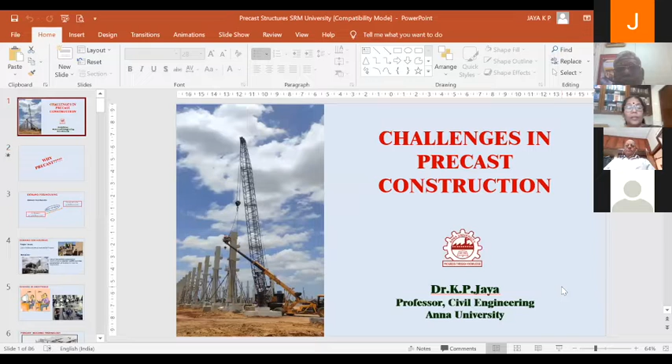So my topic today is challenges in precast construction. Before entering into that particular topic, I just want to say why precast.

We are very familiar with monolithic construction, what is happening in and around us in society. But we need to think about why we are going with precast. Look at this particular slide. Think about the demand for housing. In the Indian scenario, at present, around 26.53 million units is the requirement for accommodating our own sisters and brothers to have their own inhabitance. But after 10 years, we are expecting around 50 million units as the expected requirement. How will we do this with normal monolithic construction?

Now itself, we are facing a major issue: lack of skilled workers to execute the project. This is the normal way of constructing beam column connections, putting partition walls with brick or brick masonry structures. There were skilled laborers available when the demand was less, but now the demand is too high and we don't have availability of skilled workers. So what is the solution? We have to go with some mechanized construction, which nowadays we are calling precast or prefab construction.

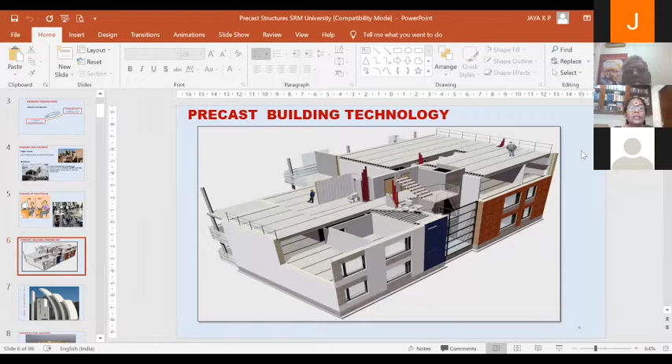And look at this, we are not away from this technology called precast technology in India. This is the historic representation. In India in 1959, we have a building, the IOB building in Chennai, constructed out of precast elements. But unfortunately, later on, we identified that in some portions where water accumulation occurred, water percolation and leakage was observed. That is the major reason behind abandoning this technology from being taken forward in the construction industry.

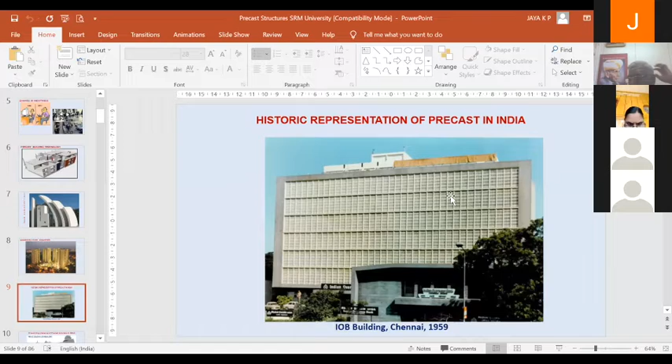There are few strengths like speed, low maintenance, seismic resistance, all those things are there. Along with the strength, there are some weaknesses also, like lack of awareness. Many of our engineers are not aware of this particular technology because we are not teaching them in our PG or UG program. Later, from 2006 onwards, we started teaching precast technology to our PG students in Anna University.

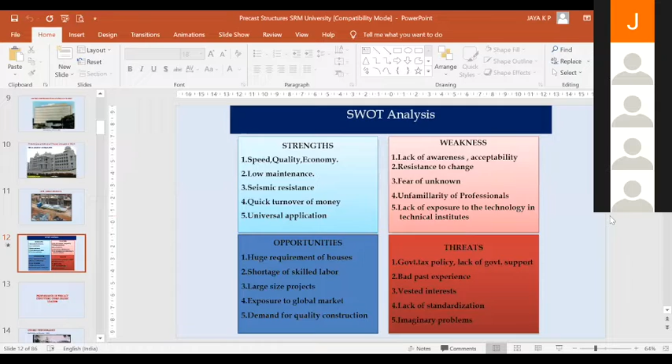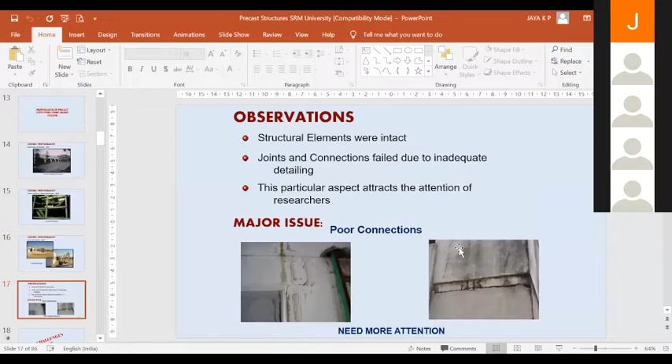This is the Bhuj earthquake, you can see the school building has collapsed. You can see columns are intact, beams are intact, planks are intact, but the structure has failed. That is the major observation — structural elements were intact, but joints and connections failed. So the major issue with precast structures is poor connections. We need to give more attention towards that.

Look at this major challenge here - there cannot be major variation in the positioning of the reinforcements, and all these things have to be perfectly arranged, then only the connections will be proper. This is not only one connection - for a small building itself there will be a number of columns and foundations. All these should be housed properly, then only the execution will happen comfortably.

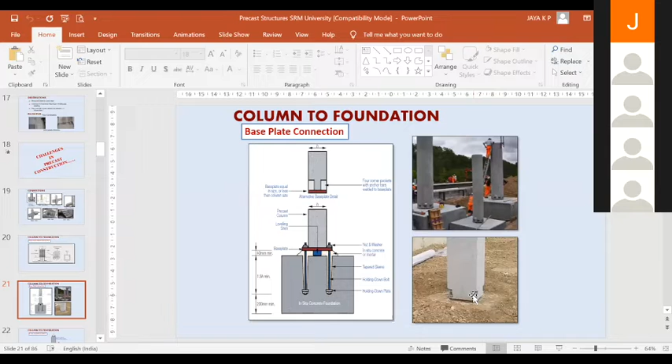You can see here this is a practical view from the site. This is the foundation - from there the bolt will be protruded and the column will be placed with the base plate, and nut and bolt will be connected. This protruded area, this pocket, will be covered with non-shrink grout in a later part, and finally it will look like an in-situ constructed foundation column connection.

This is another way of connecting the column to the foundation. This is a pocket, and this is a column with the shims at the bottom, and this cavity will be filled with non-shrink grout.

Based on this column to foundation connection work, one of my scholars, Ms. Mamadi, has done this research. She submitted her report and she is about to defend it. These are the different types of connections she has adopted.

Precast column connection through the base plate - these are the anchors coming out of the foundation with the base plate connection. And this is the sleeve, grouted sleeve connection.

She has put - you can see here, these are the sleeves. This is the view of the area where the grout will be inserted in a later part. And this is the pocket connection.

There she has used two types of connections. One is the pocket, where she inserts the column - this is the pocket. There she has put reinforcement all throughout, covering the pocket together.

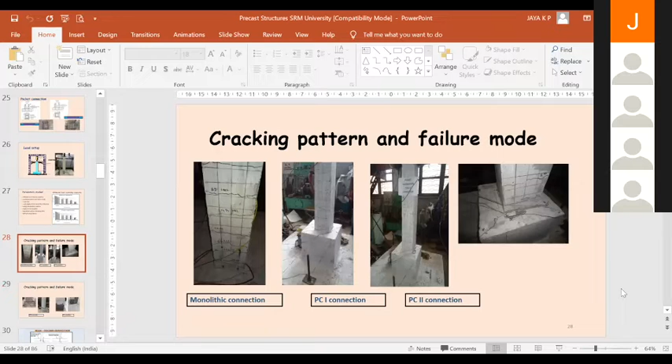This is the view of the load setup in the laboratory, and she has done a lot of investigations. This is the cracking pattern. I'm showing this to give a clue about how we can execute research and come out with a solution. Finally, we identified that the pocketed connection with the totally wound reinforcement all around performed better for a low-rise building.

Now come to the next type of connection: beam column connection. This picture has been taken from Elliott's book - a very good statement that has been made by Elliott also. You can see here, the column is continuous and beams are discontinuous. And here the column is discontinuous and the beam is continuous.

If we think about a better option out of all these, connection A or B may be better, but what is lacking there? We cannot cast multi-story height columns in the factory and bring them to the site - erection is a difficult task. So finally people will go with this type of connection.

Which one? Type C, where all elements are meeting at a particular junction. So junctions are always dangerous - here also it is dangerous. So we have to provide proper connection detailing.

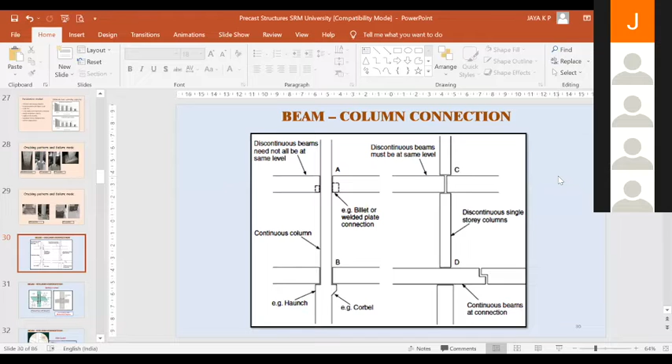These are the various types of connection detailing without corbel. We can go through this - this is the beam passing through the column.

The column is discontinuous, and this is the dowel protruded outward. These are the major challenges in precast construction - this protruded bar should be properly inserted within these column sleeves. That is the major challenge. That is why I am telling you this is a threat, and we need to go with standardization.

So this is the beam column connection with the corbels. You can see here, these are the corbels and these are the beams getting connected. This is a very simple, very safe connection, because the dowels will be protruded outward from this corbel region, and this reinforcement which is protruded outward can come to the columns also to get a proper view. This is the beam column connection.

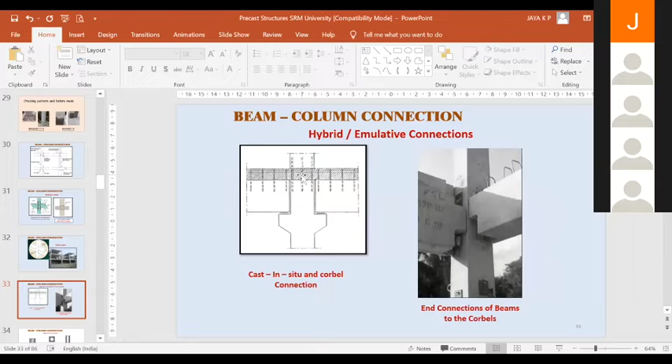Again, this is going with the hybrid or emulative connection. In this case, the beam has been cast - this portion is precast and the stirrups are protruded outward. Later, when it is connected to the column, this particular portion where the stirrups are protruded outward will be filled in with cast in situ concrete. So this is what is called the hybrid or emulative connection. We assume that we can achieve strength similar to that of a monolithic connection.

So this is another type of hybrid connection. This has been generally followed by Shirke, BG Shirke. There they are using a cavity sort of thing. This is a double column connection. This is a shell, and after erection, this interior portion where the dotted shade is shown will be filled in with the in situ concrete. This is the way they are constructing the beam column connection.

Here, beam reinforcement which is protruded outward will be bent into the interior of the column, and they will be connected together like this. This is the longitudinal reinforcement continued through the column region, and this entire portion with the dotted hatch will be filled with in situ concrete. This is the longitudinal view of hybrid connections.

And this is the actual practical view. This is the column - you can see here the protrusion projecting outward. On top of this column, the beam edge will go and sit. You can visualize that in the next picture.

So what has happened here? This is the cavity - there you can see the protruded reinforcement also. The main reinforcement, longitudinal bar, will be connected, passed through this top region, and it will be cast as a single unit in a later part. This is a picture taken from the Metro Rail Station, Kalamassery.

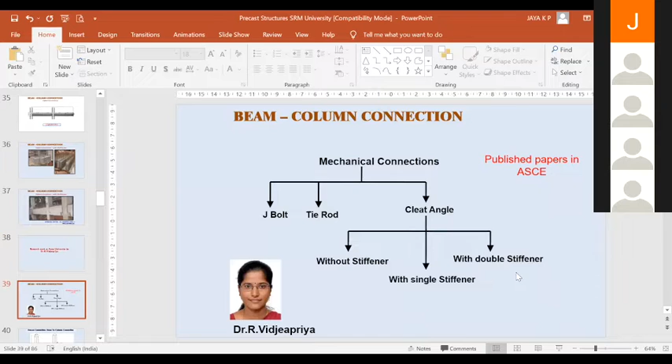This has been done by Teemage Coimbatore. One of my research scholars has done work on beam column connections. She has done a lot of connections, and we have published papers in ASCE journals. These are the various types of connections she has considered.

Tie rod connections, and this is the cleat angle connection - you can see here this is a cleat angle which is connected here. We have connected with one rod here, another rod here, and this is another option with a single stiffener. We have put in this one stiffener also. We have tried one by one.

Whenever we couldn't reach the strength up to the monolithic joint, we did a lot of improvisation. That's what is shown here - we have used a double stiffener also here, and this is the double bar which is coming out. That's what I told - this is a better solution.

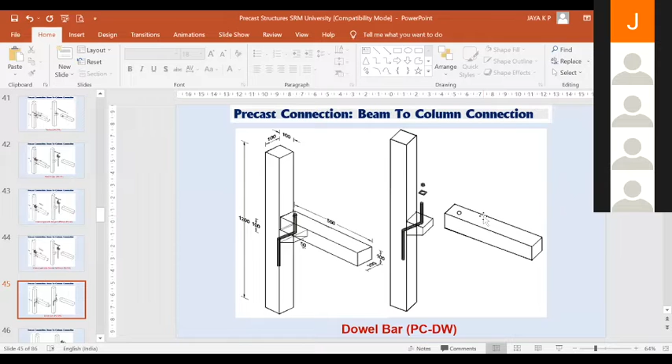This is a corbel. This is a double bar coming from the column region, protruded through what I can call the corbel, and the hole within this beam can be housed through this bar and rest on the corbel. Later it can be mounted with a nut and bolt. This is one another method.

This is the method we have tested in the laboratory, and these are the specimens - she did what I can say is numerical analysis also, and we identified that this type of connection has given more performance during lateral loading.

Now we come to the column to column connections. This is a very, very important connection in any precast structure. This is, you can see here - one minute.

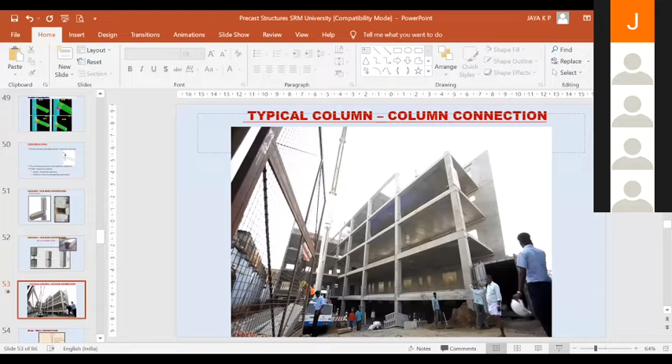Video is viewable. Yes, ma'am. Yes, ma'am.

This is a video I have taken from Chennai Silks Velachery site.

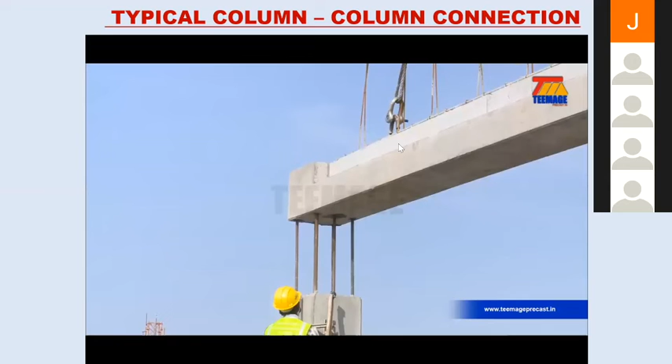I think whatever I told, in one scene it is clear. Am I correct? Yes, madam. Yeah, this is nothing but connection.

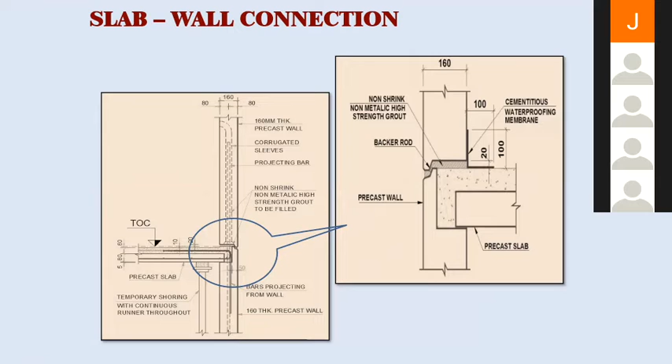Due to the demand or requirement of architects, they have improvised that and changed it into this particular shape and size. You can see here the projection has come down, reduced to this shape, and this is protecting against the percolation of water to the interior part of the building.

One of my research scholars, Ms. Dr. Aradi, she has defended and she got her degree also. She has done work on wall to slab connections.

She has used many types of connections like dowel bar connection, provision of crossbars, and additional shear reinforcement.

She published 4 papers in International Journals, and she received a Best Paper Presentation Award at NIT Calicut also. She is a very good scholar, and she has done very good work. This is the monolithic specimen what we have kept as a benchmark element.

Gunasharan sir. Yes, yes, madam. How much more time? Will I get 5 minutes? No issue, madam, please take it. I think I have crossed my time. No issue, madam, we can manage. 5 minutes, I'll finish it off.

Okay, yeah, this is what I can say. This is a wall to slab connection. You can see here, this is the upper panel and this is the lower panel, and we are getting them connected.

This is the cross section of the precast element. You can see here, it is 2 layers. Because if I take long time, you can see here, this is the proposed type of precast connection. This is the precast element. This particular area we have provided the screed concrete.

There we used, you can see here, this is a wall to slab connection element. And here wall to wall dowel bars, we have provided one dowel bar like this. And this is the bar which is getting connected with the reinforcement.

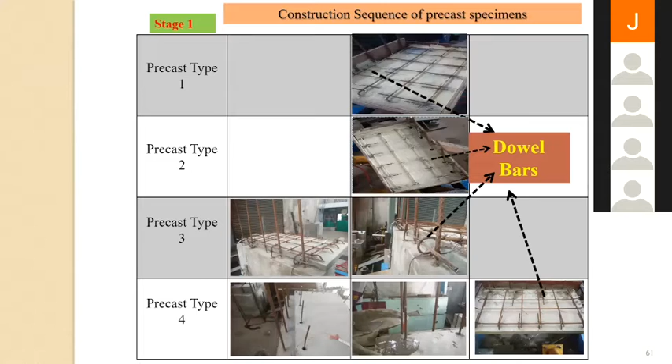And this is the methodology followed at the site. You can see here, these are the dowel bars we used. And one observation we made, I'll tell you in the long run.

This is the casting of the concrete, and later it was placed in position, and screed concrete was poured. This is the final view: this is the bottom panel, and this is the top panel of the wall, and this is the slab where we are getting connected.

This wall, this slab has two parts: bottom precast and top cast in situ. And this is the arrangement in the laboratory. This is the specimen, double acting jack and all these things. And this is the loading protocol.

And these are the hysteretic loops we got, and these are the failure patterns of all these things. The major observation initially we got is there is a splitting up at the interface between cast in situ bars, slab, and precast slab. Our major suggestion based on this particular study is that we should provide shear reinforcement in between the cast in situ and precast slabs.

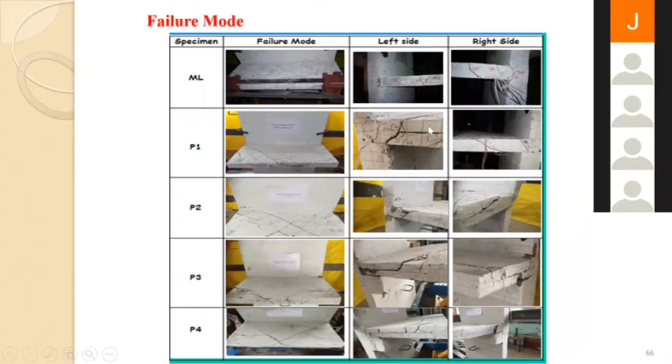And these are the studies she has done on precast. You can see here this delamination of two types of slabs has been very well picturized in the numerical analysis, and exactly the same way we could picturize it in Abaqus software. You can see the lifting up of the slab, exactly as we could picturize in Abaqus. So these are the work outputs of all those things.

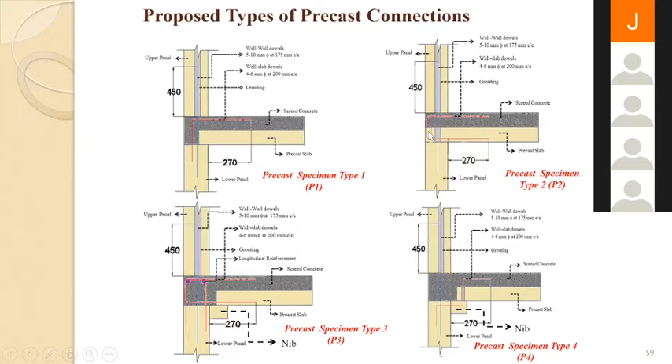What we observed is that the shear connector, the last one, which is protruding through these slabs, has performed very well. See this one with the U-hook connecting through the slabs has performed very well, and the edge also we have stiffened accordingly. This is a slab to beam connection.

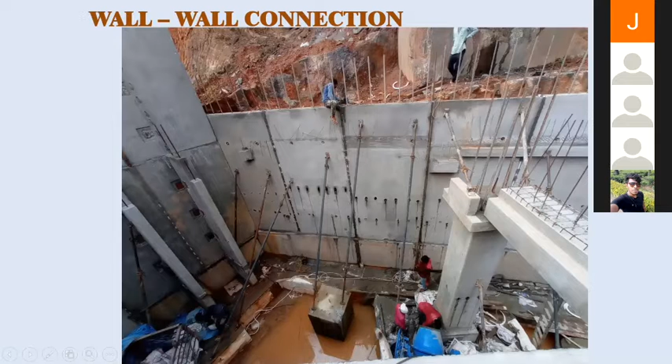Now you can see here, I am projecting the wall-to-wall connection from the picture from the side. This is one wall to another wall connection, and we have to provide intermediate loops between these walls before pouring the concrete. This indeed is the joint region. We are pouring the concrete at a later part after connecting the walls together.

You can see the view of it. So this is the connection region. Later, we provide formwork on the outer side of this connected detailing of the reinforcement, and the concreting will be poured after placing the walls.

And we are using, most of the time, these type of loops or bent reinforcement. There is a lot of work happening at IIT Madras with Dr. Amlan Sengupta and Dr. Meher Prasad. There is much work happening with respect to these wall-to-wall connections.

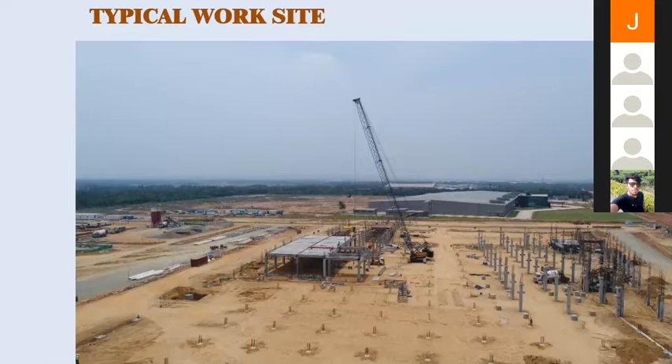But if we get a site like this, yes, we can enjoy like anything. But it's very, very difficult to get a site like this with an open space. So with this typical site we can be happy. And look at this, there are a lot of complicated plans.

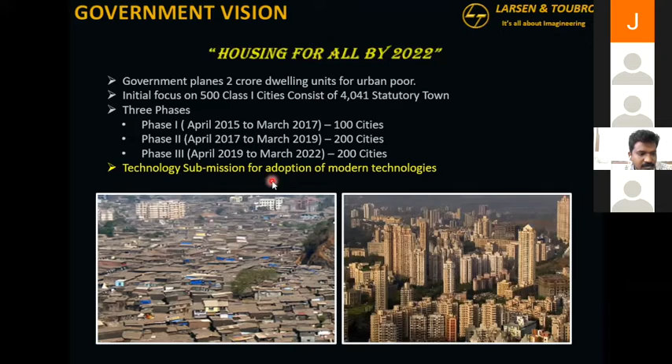We are not doing anything new. Most of our neighbors have done this already. If you see Singapore, Shanghai, Tokyo, Hong Kong, they've all gone through the same challenges and housing situations. What is unique to us is, they've all done this in a 20-25 year timeframe, but we are looking to do the same thing, or actually at a larger scale, in about 7 to 10 years. So that's the challenge that we have.

Again, in terms of infrastructure, have we not done this already? If you see our metros, airports, and the high-speed railway now being built, the latest technology is already there. If you look around Mumbai right now, there's a high-speed rail project, an entire metro development, and coastal road development going on. In one city, there are 3 landmark projects going at the same time with the latest technology. Most of the situations that probably not even the European or Western world have experienced, we are using those.

But if you look at housing, somehow that has not translated. We are still mostly using conventional means. 95% of our construction is still built using conventional methods. The only way, or one of the key things, how outside countries have solved this problem is mechanization. So when I say precast building, that's not the only solution. Any mechanized building, anything that works on a mass scale, maybe PEB or precast. Precast works well because our population is used to concrete and there's huge comfort in seeing that brick and mortar building. So that's how precast is becoming popular here.

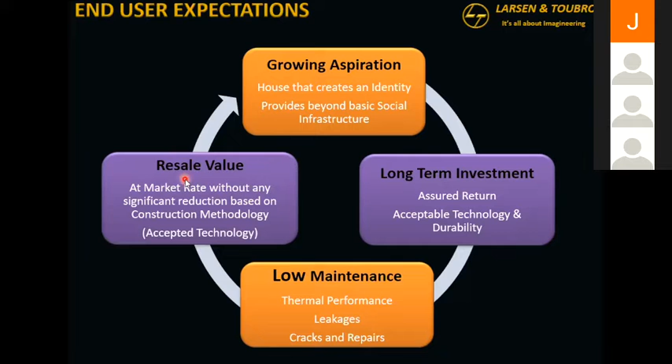So they want a house that's a status symbol. They want something long term, not something that will stay for 5-10 years. They want that house to be given to their families. They want low maintenance - that is one of the key agendas, because whatever the housing prices and all, their main worry is will I be able to maintain that house. I don't want this additional burden, because I get the house at a very encouraging price. And of course the resale value should be acceptable - tomorrow if I need to sell it, somebody should willingly come and take it off.

So that's the basis behind what we look at when we evaluate different technologies. I think, college students, over the next 10 years we are going to evaluate various technologies to get rapid construction in place. These are the key things when it comes to housing you should be aware of - this is what your end customer wants.

Now what we have done - if you see, this is pretty much the history of L&T. We have been doing conventional construction since the last 50 years. In the 90s, we experimented with tunnel formwork. This rapid construction demand is not new - we have been doing this day in, day out for several years. If you explore the way the technology works, even today this is by far one of the fastest construction methods you are going to see.

It works even faster than precast, but it works for very boxy buildings. There are very stringent layout requirements that usually are not accepted by the end customers - rectangular buildings, or very rectangularish layouts, which usually does not work in Indian construction.

Then around 2000, we started doing aluminum formwork. This quickly became one of the most popular construction methods now when it comes to rapid construction. In residential construction at L&T, 95% of the projects to date have been constructed using the aluminum formwork system, to an extent where within L&T we own probably about 6 lakh square meters of shuttering - usually that's a huge number.

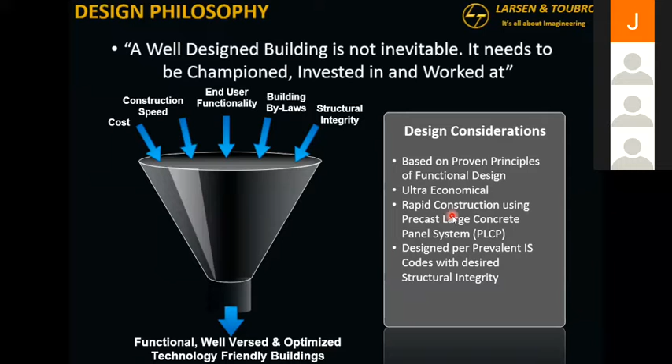With all those parameters working together, L&T is one of the very few contractors who has its own in-house design firm. I used to be in the design field, now I've moved to the BU side. But we are one of the few contractors who have all design engineering teams, including structural design, architectural, MEP, and construction methods. So we get that one unique solution, and that's how the precast technology at L&T has evolved over the years.

So the client gets one answer. He's not going elsewhere just because you are doing precast, asking what do I do at the MEP. We don't say you go to a different consultant. The solutions we are looking at, which will probably over the years set the industry standard, look at all engineering aspects.

Now, before we go further, one key point to note is we usually have two different systems. One is the beam column system in residential construction, which is what we have been doing for several years. And then the new rapid construction - usually the aluminum formwork system, the tunnel formwork system, or precast - they come under this load-bearing shear wall concept.

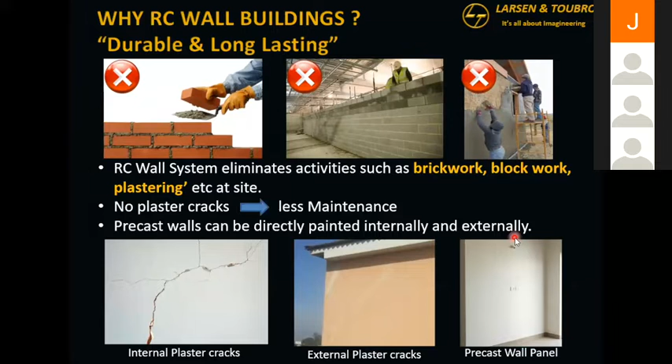It's going to last there without these maintenance issues from both internal and external factors. So this is one example. This is our own project.

Especially for mass housing or government housing, where maintenance budgets are not sufficient - if you see this building, the first story was done in cast-in-place, and above is precast. This is a 9-year-old building which has been handed over. If you see the plaster, this was actually year 2 and year 3 where it starts fading, spalling. The paint is going because the plaster was never meant to be a long-lasting element - it's a finishing element, but it absorbs water, absorbs moisture. The moment water gets into that, you're going to see the paint fading.

Here, it's an RC grade concrete. The paint has not been retouched for 8 years, and this picture was taken about 6 months ago. So in 8 years, that building has stayed the way it is. I'm not going to go into key details or advantages, but in general, whatever benefits you get in RC aluminum formwork type buildings, you are going to get the same benefits in precast, plus the advantage of speed and quality, which comes from factory quality control. How about the design now?

What do we do when the precast design comes into picture? Even in the structural philosophy, there are two main things. We are probably going to focus on the large panel system that we proposed for housing. Then, of course, there is the beam column system and separate research. Professor Jaya has already covered a lot on those connections.

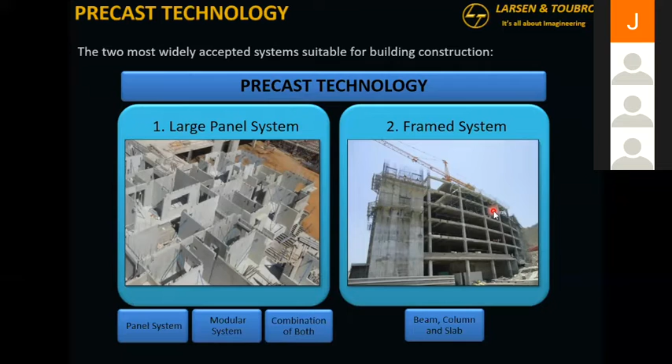When it comes to load-bearing wall systems, all you are looking at is dismantling your building into as many 2D elements as possible. Those are easy to manufacture, easy to transport, and then pretty much just take them to the site, assemble and stitch it. What we call stitching is the wet concreting to connect these two members together.

There is no rocket science, but from a contractor or rapid construction perspective, the conventional construction system has formwork, reinforcement, concreting, then you come back and do block work, plastering, POP work. What we are doing in precast is mainly eliminating this block work, plastering, POP work, which usually takes a lot of workforce and a huge amount of workman activity. Whatever key or cumbersome activities are left over are done at a factory. Then you transport the element and finish at site - that's where your advantage of time is coming.

Structural design philosophy wise, if you look at the conventional beam column system, we'll have beam columns as gravity elements, with some lateral shear wall elements taking your wind and seismic lateral load. What we are proposing here is that by default most of the walls are going to be your load bearing members. Some of those walls will be shear wall elements, and that's how you design the building.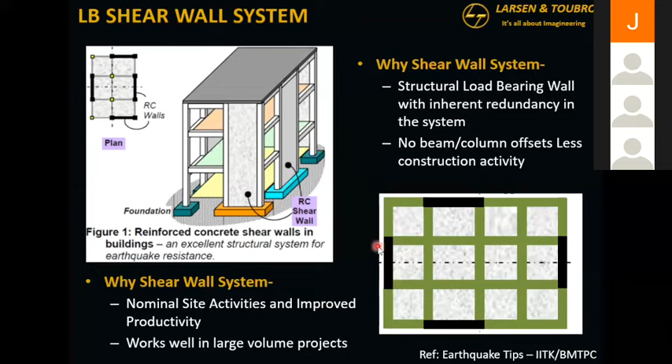It has its own redundancy. In the earlier system, with the progressive collapse requirement, if one column is damaged, your entire large area is in question. In this system, if one small portion is damaged, there are still several walls there to take care of that element, so that redundancy is better.

Now with that system, how do we analyze the precast system? What do codes say? This is one thing I want to stress with everyone. In precast connections, there are two different schools of thought. One is the emulative approach, which says you detail your system such that it will behave equivalent to your monolithic RC construction. And then there is the jointed approach - welded and bolted connections.

Before I came to India, all 10 years I was doing only welded and bolted connections. Nobody is doing the emulative approach there. Why? Because it takes time, there is wet concreting involved, and it's more expensive to do it that way. Welding and bolting are easier. Second, usually they don't build tall - usually buildings you will see are 12 to 15 stories, not more than that. More than that, usually steel is cheaper there, so that works well.

Here we are building a 23 story building, and we even have designs for 30 stories, where the emulative approach works well, even if it comes at a slight cost of time on site activities, but performance and design is similar to conventional. So that's how we have taken all our residential projects that you see.

They're based on this emulative approach. If anyone is interested, there is actually this ACI document 550.1. There are various revisions also, but this is one of the best guides from the American Concrete Institute. What that says is basically emulative detailing provides structural performance that is equivalent to the structural performance of a monolithic concrete structure. Equivalent, that word is important.

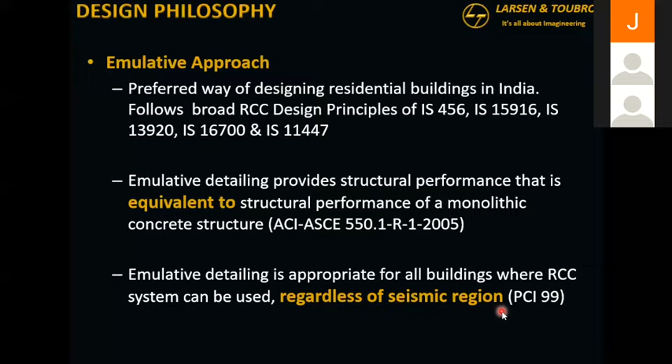Apart from your lateral design and all, what you will usually do is establish structural integrity connections. The rule of thumb has been that each element has to be connected to at least 3 adjacent elements. So if you see your slab, it's connected to 2 additional slabs and the beam or the column. If you see this column, it is connected to 2 beams and the slab. So that has been the industry rule.

There are requirements for this. Even IS 15916 specifies now all these minimum rules of thumb. It is a prescriptive design, what all ties you have to do, and the forces, or what steel is to be provided. Those details are available in Indian codes now.

Now, quickly looking at that structural integrity, or emulative, or the equivalent performance I mentioned - that was there, but when we started, we wanted to validate that at our end. So what we did is, this was a program done in 2015 in conjunction with IIT Madras and SERC Chennai.

This wall is different. We used grouted couplers to make these connections that you see here. This is one of the very popular systems used in Europe and the Western world to make connections, the grouted coupler system. And why it gives better performance than even the conventional system is, this conventional system still has detailing based on lap, so your lap connections are governed by your concrete around it.

The principle is, if that concrete around is confined, that's exactly why we do the horizontal shear loops and all, to confine the lap bars. If it's confined well, it will give you better performance. And if you see in this grouted system, this metal sleeve is confining that grout.

And it will do that for 20 cycles, then pull that bar to twice the yield, do 4 cycles, it will pull that bar further to 5 times the yield, and then it will make it go to failure. So that's where that ductility is getting looked at, right?

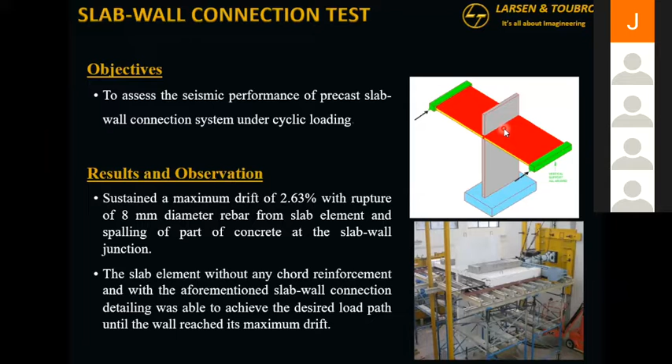So we did another test program where we looked at even the diaphragm action, how the slabs are collecting the loads and transferring to the shear wall. Again, full scale specimens, and everywhere we are getting more than satisfactory performance, and the validation that the detailing we are using is actually working.

If you see, this is also the same discussion we had with CIP concrete precast slab, that delamination issue. With the kind of detailing we used, we did not see the delamination effect. We followed the forces and all, the detailing was done right.

Same for the vertical shear wall joints between two panels. Again, for that shear we tested, then validated. So the entire system we are proposing for this load bearing shear wall for housing, those key connections have been validated in-house.

All the detailing, emulative detailing has been in place for the last 50 years. People have been using it outside. We have not evolved or done anything drastically different.

We have probably tweaked it to suit our requirements and then adopted it. The next phase was getting approvals from various agencies, and this system we use now has BMTPC approval, which gives fast track adoption in all government projects. Of course, IIT Madras, we work very closely with them.

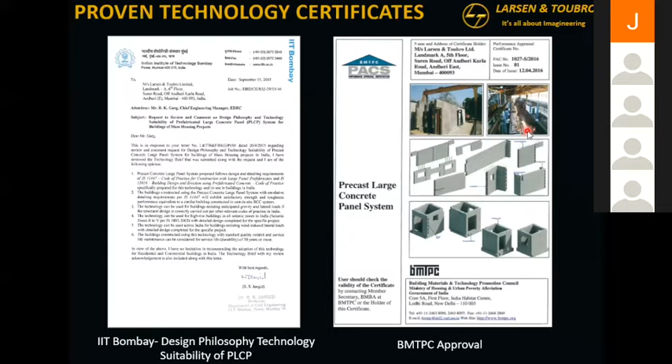All our projects, Dr. Meher Prasad and his team, get peer reviewed by them line by line by default. IIT Bombay has also reviewed it, IIT Delhi has reviewed it. We have College of Engineering Pune, VJTI Mumbai, all leading institutes. They have gone through it in detail, what details we are doing, and we are ready to use it in any large scale projects.

I think time-wise I am already slightly behind, so we will just go through the case studies quickly and then open it for questions. These two projects I wanted to mainly focus on: G plus 23 storey, about 70-meter tall buildings. We built 6 buildings in Mumbai.

This was one of the first projects we did, about 2,000 houses. In the pictures you see 3 towers, we built another 3 towers later. So total 2,000 units there.

This is the Provident Sunworth project. It came in the 2013 timeframe, after we did this. This is 66 buildings, about 6 million square feet built up area. This was about 1.2 million square feet on the earlier scale, and this is a much larger project. We have handed over phase 1 and phase 2 already, about 3 years ago, and then some of the commercial buildings we will go through.

Provident, I'm not going to spend a little more time on since we're running out of time, but various awards are already in place. Even the ICI award for the Mumbai project, we got first - ICI started one new precast award, and we got the first year's award for that Mumbai building.

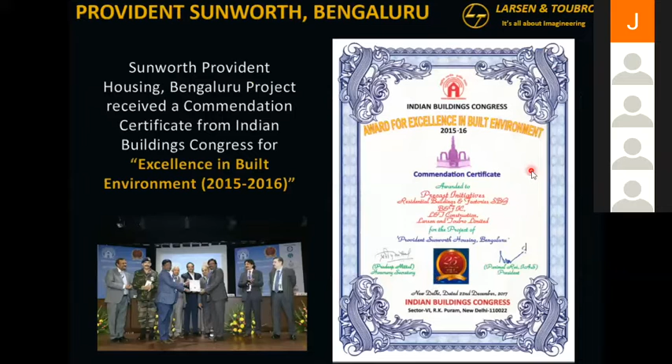But this one certificate, it kind of talks, and we are more proud of it than any other, because it came extemporary from the client for the speed. That G plus 12 building was constructed in 3 months flat. That's the speed advantage you get from this technology, where conventional construction would take at least 5 to 6 months, if not more. We completed that in 3 months at peak.

So this is the project snapshot. These are the 4 phases that you see, each band, and we have completed 2 phases. The balance 2 are under works.

This one thing I wanted to point out: the first building I showed in Mumbai was the PMAY housing or SRA building, all units the same, smaller units and typical. In this Provident project, this was pretty much like a sale building. These sale units, two types, whatever is there in the market or any traditional housing that you would see, the same was taken and adopted without any changes, and we kind of wrapped the technology around it.

In the first year, the developer was saying that whatever precast they adopt, they're not sure how users will accept it, so they were not actively marketing it. Two years down the line, this is from their brochure saying 'advantage of precast' - they're telling people openly, saying I'm building this in precast, I'm proud of it. They even gave another job in Chennai down the line. So that's how adoption has come over the years with this technology.

So these are some of the pictures during construction, and these are some finished pictures. If you see the buildings when they're done, the whole philosophy behind pushing new technologies is the end user should not see anything different. So the whole idea behind detailing and execution is, once the product is finished, even our engineers may not be able to tell exactly where the joints are, how it's finished, or how the building was built. For them, it's just a finished flat.

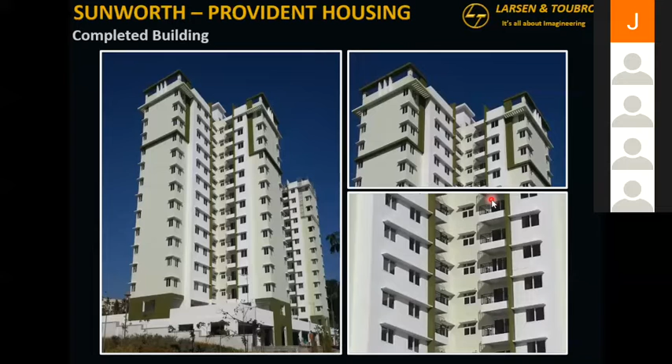If you see, this is one of the finished buildings - it looks exactly the same as they would have expected. Even if you walk inside the building, the sample flat was built using precast too, and once you walk inside you don't see anything different than what you're used to seeing. That is the goal. The factories are set up, and the whole advantage of the technology we have been pushing is very few people.

And they will do the same thing day in, day out. Second thing, the speed depends on how many cranes you put in. If you see aluminum formwork, it depends on how many sets you can put in. That's an expensive affair, that's a capital expense. Here, my factory is already sized. If I want to open up another 2 towers, all I have to do is just rent one crane and put it in, the factory is already sized for that production.

So that's the advantage. As for quality control, if you see Bangalore, this factory did not even put up the shade because it doesn't rain there. But that does not mean the standard quality is not followed. We still have the same quality measures, same quality parameters that you would use on any conventional site.

But you are working on the ground, right? In tall buildings, working on the ground versus working on a 17-story building is an altogether different ball game, both for the workmen and for the monitoring. Somebody has to climb up there and see. Here the person is roaming around at the ground level every day, looking, checking everything in detail, and then only approving it.

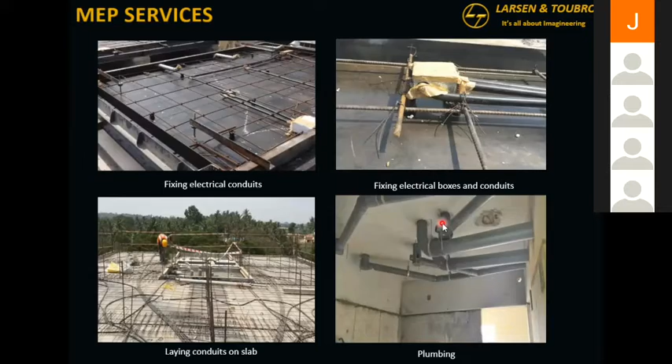So either you do this undersunk approach - this developer agreed to that, and it works well. It's easier to repair also than the sunk areas. But if you want something embedded, we do the chases for plumbing lines.

So this is how the panel will come. Electrical is already embedded, but for plumbing you give the chases so that the piping is laid and then patched. So later, if you want access, all you have to do is just open up the patched area easily, replace your pipe or rework it, and then close it.

On transportation - in 2012 and '13 we used to talk a lot about how to transport heavy elements, but over the years now there are standard trucks available, there is equipment available. It is not a big deal to transport a 10-ton element anymore, except for the road network. We don't have that kind of infrastructure yet.

So what we usually do is set up large-scale factories at the site itself, so I don't have to worry about transporting for longer distances. When the elements go outside, the same quality control applies - like I said, a well-trained gang of 12 to 15 people, they know exactly what to do. They don't have much to do also. Elements come from the factory ready.

You just have to prep the slab, make sure all levels and lines are maintained, the dowels, whatever you want, are there and correct or not. You clean the joint, erect the panels, align them. We have these push-pull props. Make sure that the joints are grouted, put your slabs, and then do the slab concrete pour.

That monolithic pour is what we call it - all these slabs will be erected, and then the entire floor will get a continuous cast-in-place structural topping, 75 millimeters thick, that acts as a diaphragm that gives me the continuity and the stitching we are looking at.

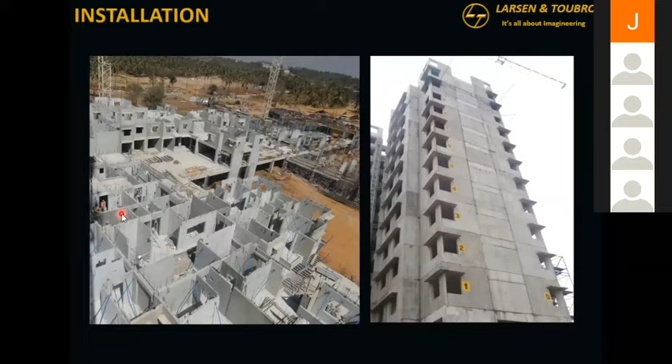This one job quickly, just to give a flavor of how we adopt different approaches. It's a very small job - usually we don't even venture into these jobs, but this came up because they needed it in 8 months. This is a hostel building for Tirupati Devasthanam. So they were originally G+3 systems.

They were designed for 2 extra floors. With the speed we were using, the client said to add the 2 floors immediately because they weren't sure if 3 floors would be completed in time. So the design philosophy was: build 3, start using the hostel, and add 2 floors later. But given our speed and the system we had in place, they said just add the 2 floors and finish the building. So this is how it's done.

It's a small building. We had 4 or 5 buildings. What I wanted to show here is 2 unique things.

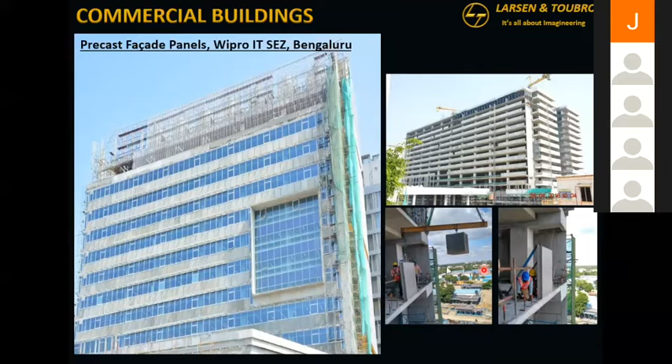This is a building in Bangalore, Wipro, where only this facade was done in precast. Like I said, we are not in the precast manufacturing business, but across all our jobs, the idea is: wherever the system gives us the benefit of speed or fewer activities at site, we adopt it. Even this small portion - doing this band cast in place with shuttering, compared to casting off site and erecting element by element at site. That's the idea, and it has really picked up well in the last 5-6 years.

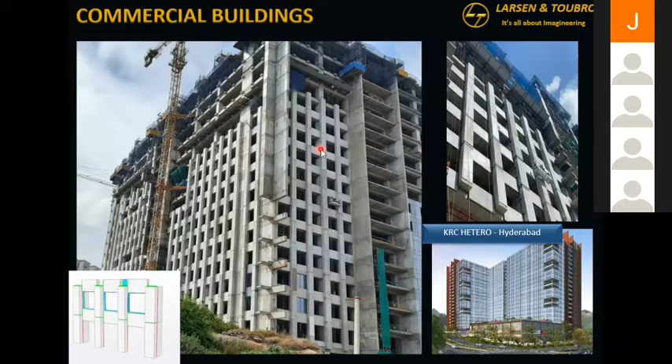We are now exploring the same thing in a job in Mumbai. This is a 27-story tall hotel where the entire facade was planned in block work, which takes a huge amount of time. We converted it to 2 floor-to-floor tall precast panels. Each panel is erected in under 30 minutes. Imagine it's a 4.2 meter tall panel, 2.3 meter wide, erected in 30 minutes - that's the speed we are looking at on site.

Pre-finished has been a big thing for us. In Mumbai, all residential buildings, even one of the topmost elite housing buildings, we are using bathroom pods now. The idea is the pods are cast in the factory, with the entire toilet unit finished at the factory, no activity at site. Lift it, place it, and it just gets opened once the site nears the handover phase. No other work in the toilet is done at site.

I think, Professor, how are we doing on time? About 5-10 minutes more? Yes, sir. We can go ahead, sir.

So now I am just at the end of that presentation. We've talked about the system, the design philosophy, and what we are doing at site and how we are setting up the factories. This now is the handover stage, how I give it to the client. Usually the client's concern is speed - everything is the contractor's issue, he's not worried about it except getting the building faster. But his main long-term worry is how the building is going to perform, whether there will be cracks, whether the building will fall under earthquake, or in day-to-day services whether moisture and water will get inside. We have been working diligently on that detailing to make sure the buildings perform similar to what we are used to.

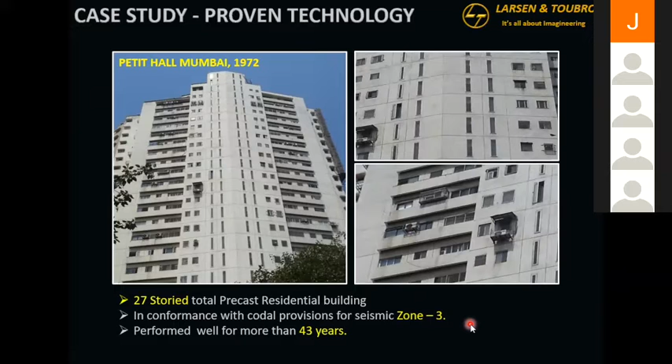Each flat is about 15 crore plus in value now. It's one of the prime real estate areas, and it's an occupied building without issues. There is maintenance - on one of the facades they see moisture seepage and they treat it and work with it. So if you look at the detailing, the durability, whether the joints will sustain - those questions aren't there. The building is in zone 3, has seen a fair amount of shaking even if not an active earthquake on its own, and it's in pristine condition. So if you detail well and maintain well, these buildings will last forever.

This is M30 and above concrete - it's not your usual plaster. The actual concrete grade we use based on our factory requirements is usually M45 to 50, so the concrete stays there. What we have to do is pay attention to detail on the joints, make sure all your QA/QC is focused on the joints - the rest of the QA/QC is taken care of in the factory.

This is the same project, Professor Jaya, where one of the first inclinations to protect against water ingress was to physically add a barrier - just put a band on it. Some architects liked it, some didn't - they didn't want the band. So now we've evolved the detail, doing the same thing but putting the step inside, and working with it to see how that works.

The whole idea is water cannot climb up effectively, so make sure that the path is blocked that way. In addition, we do additional treatments at the joint. Now usually you won't do waterproofing inside.

This is a living room, kitchen room. As a management, what we have taken the call is, even within the flat, if there is a joint, we are treating it. So between living and kitchen also, it's not just between two flats or two living rooms. All entire joints, we are taking that extra precaution and treating those. And then subsequent water ponding, select areas and making sure how it works. So that kind of precautions are taken and evaluated.

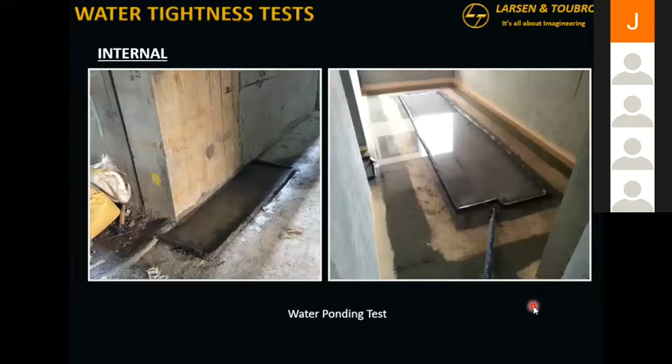So it's as good as we are building water tanks. Even the external joints, we have a rainfall simulation test, to make sure how the joints are performing for moisture entry. Now we have IS 15916, the 2020 version, and these requirements are actually incorporated in the IS code itself. So you have the basis to ask the manufacturer or vendor what kind of or what scale of testing is needed. So those details are available there.

Last part of quality control is we are testing and scoring our own buildings. So we have an in-house system. If you are familiar with the Singapore system, they have CONQUAS, which is for construction quality assessment system. So we have developed something similar to that, calling it the precast building quality assurance system. We are scoring our own buildings for various aspects, structural, architectural. We have our own teams that go and score these points.

Right now, somebody will ask, you are scoring your own buildings, you will give 100 only. So this is not something that the client is asking. This is our own initiative, and the idea is I know what I am doing. So the Mumbai building I have built, the Provident building I have built, and those buildings are scored. Those scores are coming, let's say 85. When you come as a client or as an end user, I'm going to show you the Provident building and tell you that this building is scored at 85.

This is how we have scored it. When you get your building, it's going to be 85 or more, and there is a basis, there are scale points that physically even the client can come in and check it. So the idea is not scoring higher, the idea is creating a benchmark. So for the next 20 years we have a benchmark saying at least this or better it should be done when it comes to precast construction.

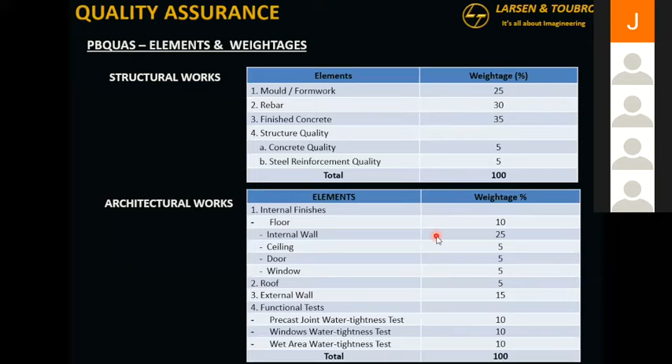So with that, I think we'll quickly go through the CIDCO project, what we are doing, and then the outside world, and another probably 5 minutes and I'll wrap it up.

So this CIDCO, what we are doing now, it's a PMAY housing project, of course for that kind of volume, 7,400 units. The total project we took is about 22,000 houses. The entire thing was supposed to be in precast. That's how we had tendered it.

But it came right at the COVID start in 2020. So we decided to split some and use the conventional system, because most of our factory, the molds and everything, comes from Europe, which could not come in time. So later, last year, about 8 months back, the balance scope we have started now. We have set up the factory and we'll be completing about 7,500 units using this precast technology. So this is the project.

If you see all these buildings, all these are the LIG type buildings, and the volume is there. The units are similar, where we can easily adopt the precast technology. These are done by architect Hafeez Contractor. So their whole goal is, I don't want a typical traditional monotonous building. So they have their architecture.

So this is one of the first things where we are actually incorporating architectural details in precast. Traditionally, this will be all taken care of in plaster works, right? It's easy to do it that way, but it doesn't last. So we took that conscious call, saying I want a maintenance-free building. So all these architectural features, grooves, everything, we are actually building into the precast panel itself, so we don't have to worry about durability.

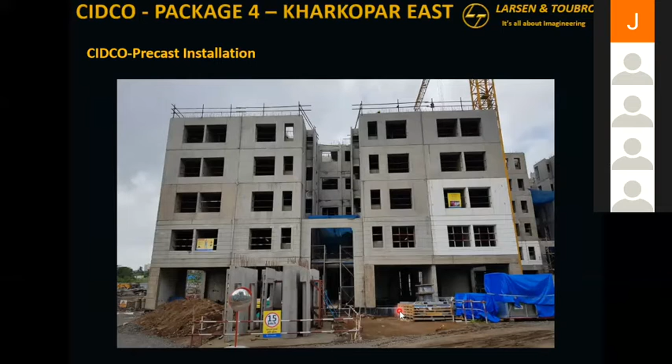So this is the factory setup at site, about 2.2 million square foot built up area per year capacity, all molds, some in-house, some imported. But yeah, these are the buildings. This is about 2 months old photo, but this is what I was telling - the grooves, the bands around the windows, features are all inbuilt, so I don't have to do any plaster work. That's the goal. This is a typical floor that you will see again, these buildings.

All flats are the same flat. So each floor has 8 flats, and all 8 flats are the same there. That's how we are working at it.

If you want to look at the speed, this project at its peak will be building about 35 floors per month. If you do that math, it comes to about 10 flats per day. That's what we are aiming and hoping to finish.

That's where the speed comes into picture. Now with that speed and this kind of volume, if you see that entire project - 7,500 houses - we are looking at about 1,15,000 elements that will be produced and installed.

So how to track it, how to keep track of it - your usual day-to-day Excel planning is not enough, your MSP planning is not enough. So we take advantage of this whole digital environment that anyway as a company we are pushing for, we have adopted that.

Everything works on a central BIM model. And then all other agencies that work around that model, including the reviews - client reviews, progress reviews, factory production, site erection - everything is monitored through it.

We have an in-house app built for that, and each element is being tracked from its inception to installation - when it was cast, what grade concrete was used, when it was demolded, at the time of demolding what was the concrete strength. The entire history is being tracked for each panel.

For the BIM model, if you see, all the drawings are also developed directly through the BIM model. We are kind of shifting away from 2D development. So if you see this picture, even the reinforcement detailing, everything is built into the model. Once the model is ready, the drawings are ready, maybe some nominal work, and we take it from there.

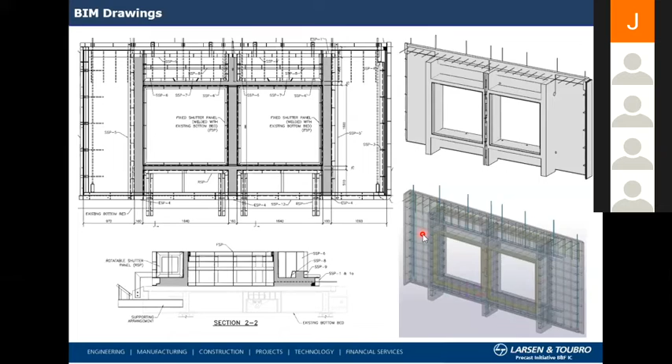Then when the action shifts to site or factory, this is the app that we are looking at. Like I said, casting, demolding, storage, factory storage, delivery - everything is tracked for each element, item by item, including the checklists done on the app.

How it benefits me as a monitoring or review agency - this is the entire snapshot. If you see this, for whatever ongoing scope of the month, if I'm going to produce 5,000 elements, I get to see the entire thing immediately, with live updates daily on the phone, saying how many are cast, how many are in the factory, how many are in site storage, how many are already erected.

That's how that digital adoption in construction we are advancing. When it goes to site also, the entire tower is tracked, each tower, each level. Nobody is punching numbers anymore for the status in Excel. All they're using is flashing their phones.

That's the idea - using the phone to get that real-time update so you can track your projects well. Once you track those well, automatically the quality control and everything follows, because the checklist and everything is at one central place. So with that, whatever we are doing, we are very comfortable with the technology - mass housing, it works.

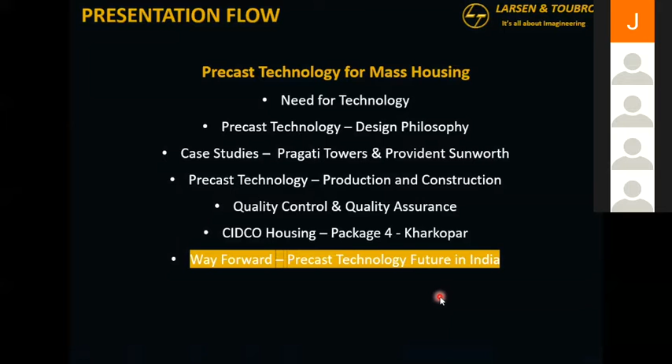What next, how we'll see in India - some of these projects I just wanted to showcase. These are all projects that I had managed when I was in the US, the architectural projects. This is something we will start seeing more and more now that we are comfortable with technology.

If you see this picture, everything is a precast panel. None of these activities have been done at site. The panel is cast with these forms. Panel is cast with these actual bricks cast in the factory. This entire panel has come as one panel and been erected.

There is no plastering, no painting. The panel is white cement, has its own color. That kind of premium the outside people are willing to pay because they don't want anything at site.

We are still looking at only doing the structural element. This is the architectural cum structural wall. That's where we say the value creation - what you are giving to the client is not architectural brick lay.

This is M50 grade concrete inside with a thin brick outside. No painting, no finishing, just joint treatment, and you're done with it. Same with this building.

The entire structure has been done in precast, factory made, no site treatment. This is another parking structure. Same thing - bricks, finishes.

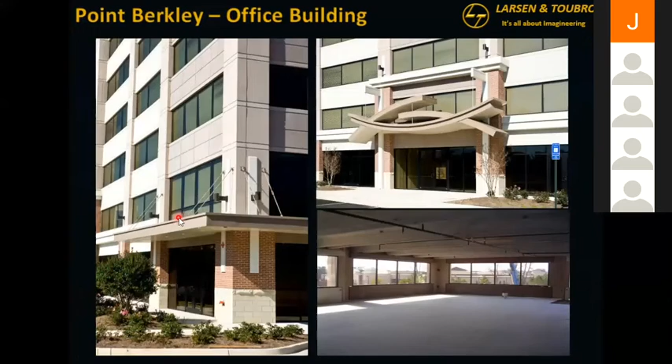I think we're running out of time, so I'm just breezing through it. But yeah, these are all different. If any architecture students are there, these groove patterns behave differently. The architects have their own thing for the shadows and all, but everything is worked at factory and then installed.

In India also now we are getting this form liner. There are multiple companies where you can produce with these patterns. We are even looking at graphic concrete and all these features. So going forward, this is something exciting that may come up.

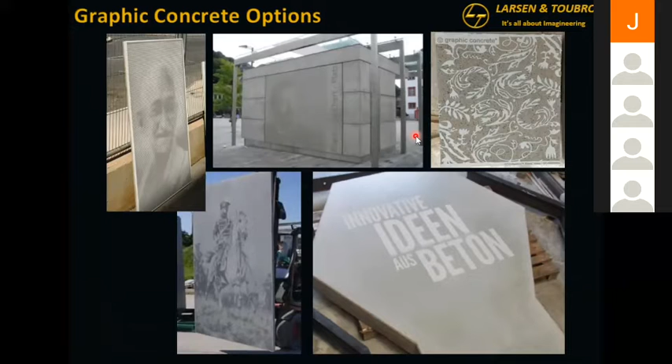I think with that I will conclude. I know I have taken more time than needed, but hopefully it was meaningful, helpful. Of course, if you have any questions now or even later, feel free to approach us and we'll take it from there. Thank you very much.

Pavitra, madam. Sir, actually, I have a question, sir. Sure. Sir, can you hear me, sir? Yeah, I can hear. Yes, sir.

So actually, most of the precast projects I'm seeing in Chennai, the minimum thickness of the RC wall is 160mm. Okay, correct sir. Is there any restriction to be 160mm or shall we increase it? Because I see some two projects for leading builders, completed 5-6 years back, where we can see some reinforcement protruding out in some stories.

Okay, correct, because there is no sufficient cover on the RC wall. So I can see that some of the reinforcement can be seen outside near the toilet walls or near the duct and all. Can we slightly increase the wall to 160 to 170mm so that we can improve the durability properties of concrete? That's my opinion.

Yeah, see, I think of course if it's a thicker building, you can do cover also, it will give you more capacity also. One thing is, of course, more concrete, so cost goes up. Second is your weight goes up, so weight is a big issue. We don't have a heavy crane available quickly.

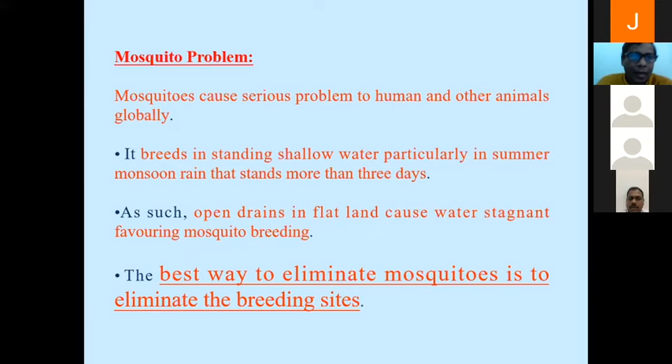Let's look into the conventional drain favoring mosquito breeding. The design here: the drain on flat ground has a very gentle slope, normally 1:200 or 1:210, something like that. It's impermeable, meaning water has to flow longitudinally — it cannot go any other way. And also the evaporation, that's the way it works.

Look at another drain, the filled drain favoring breeding of mosquitoes and other insects, seen very open in conventional drain system. If you look into this one, this is the roadside, the drain is there. So it also poses health risk. This is the issue I looked into, how we can solve this, because that structure comes from the drain.

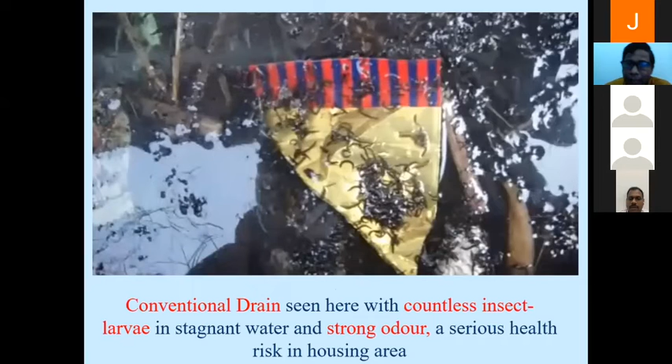Then gradually we have gone further, and we discovered this product is cost and time saving as an IBS product. In those days we started using handmade methods. That particular name we have given is 'SIConSofa potential applications.' I have not completed all of it because I have left that university. Now I'm at another university, so I cannot continue that same research here because it's a patent.

So look into mosquito drain for normal purpose, sir? Sir, yes, can you hear me? Your voice is slightly breaking, sir. Can you hear me now? Now it's okay, sir.

Okay, thank you, sir. We look into this, the same product can go into several applications, as anti-mosquito drain, that is our initial thought. Then it can be used for normal drain purposes, or retaining wall, or slope protection, or embankment protection, depending on the orientation of this product.

For record, in unit area construction we need 9.8 blocks to make 1 meter square of wall area. We can make 55 numbers of blocks using 1 cubic meter of concrete, and using 55 blocks we can cover about 5.6 meter square wall area. It depends, since it is non-structural concrete, I do not need steel rod, so I am not worried about corrosion.

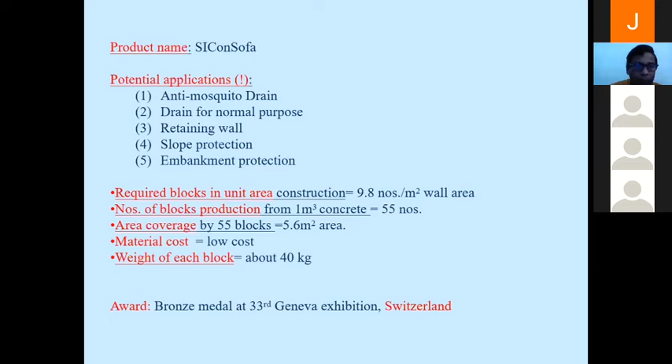This SIConSofa IBS product is used as a retaining wall without using any mortar to retain earth. This product satisfies the requirements of retaining wall structures. Drain made of precast drain beds and these blocks enhances self-drying through side and bottom seepage during rain, as the groundwater table is quite below, especially in summer. It has features of modularity, adaptability, portability, and self-interlocking.

This product performs well in absorbing minor movement due to its dry stack flexible structure because of interlocking. From a cost-effective point of view, dry stacking without using any mortar, use of ordinary grade concrete, saves construction time and manpower by about 1/3 compared to conventional systems. It's also massive because we can produce large numbers.

From an aesthetic point of view, it ensures beauty at the exposed face. Environmentally, it eliminates mosquito and insect larvae breeding, making it a user and environmentally friendly product. Installation is very rapid and simple. I have done 30 to 35 meters per wall area with 2 persons using a simple lifting device. From a market point of view, there is high potential because industries are in line with my previous university, and they are pushing me to continue.

This is my product. It looks like a sitting sofa, actually, a single sitting sofa. If you look into this one, a person is holding that block.

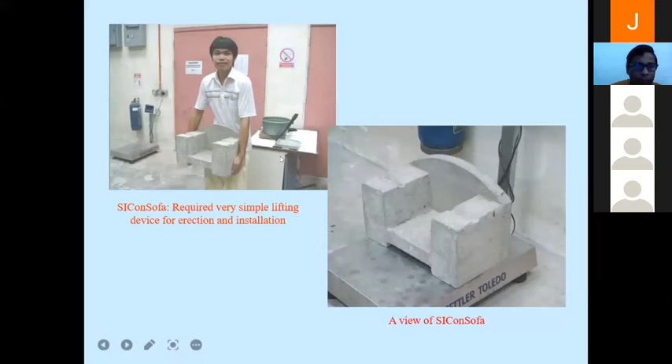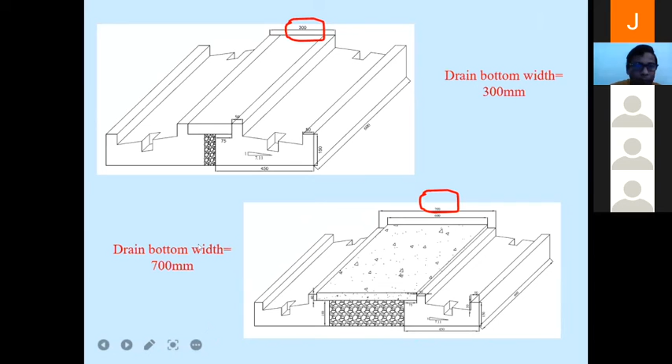Then we looked into the drawing, the 3D view, how this can be arranged. We also looked into how the back is seen. We did it like this. Then we also made the mock.

The mock is 7 meters long, about 1 meter deep. We considered 120 units. We used the block to see how many numbers we can put there. Then after that, sometimes in the drain we need cover blocks. We put some cover blocks to see whether it can be there or not.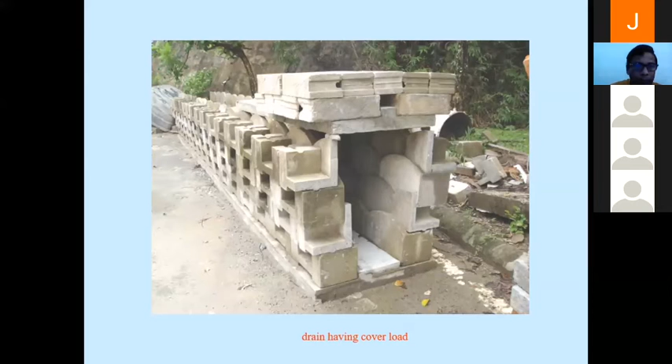We did that because our money was limited, so we looked into optimization on that money. Then we went to a company in Uganda. That person passed away just 3 months back, so that company got this license from a previous university. Then Binapuri, one of the biggest construction companies in Malaysia, considered this product. Based on that, they say being 100% precast products, including bedding block, manpower involvement at installation is about 1/3 of conventional cast in situ concrete. This is Binapuri's comment.

This is the conventional RC retaining wall, and also after the retaining wall there was an RC drain. This was their original drawing. When Binapuri saw my product, they approached me asking why my product couldn't be used there. If you look into it, it's about 2 meters deep. Look at this amount of soil that should be removed. They have to cast this RC part, but quality cannot be maintained. After completing that, they have to cast this drain again, meaning they have to go there 2 times.

Mostly it is a non-structural product. A structural product has bending moment, and for that we need reinforcement. Once there's reinforcement, I have to look at quality in the sense of durability. That's why we say it is a non-structural product. Then I made this drawing for them and they were satisfied. This is 2-in-1, it acts as a retaining wall and also...

Hello. Yes sir, can you hear me? Yes sir, can you hear you? Yes sir. Okay, okay, then I'll look into based on that.

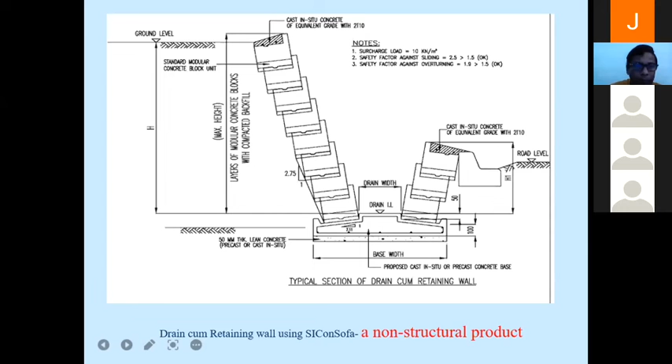Because we produced the block, we started with 3 workers, ordinary workers, not skilled workers, because this is labor. They have to simply assemble there. So they started, and after that the rain started. On the rainy days, the people also started doing the work. These people belong to another company because they have to do that side, so my staff are doing the assembling here during these rainy days.

Because this was the first project, we had difficulties here, I have to say, because there were several molds and all molds were done manually. All molds are not the same, so when you go to fit, it does not fit properly. It took a little extra time, but later on we solved this manual problem. Then you just look into it, the backfill was not done completely, several layers were there.

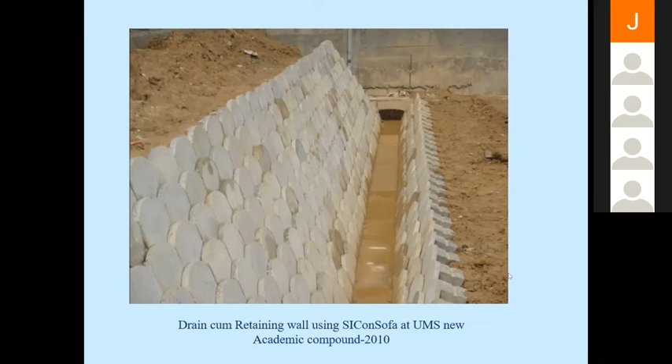Okay, just look into this one after completing. This is the L pattern of the drain cum retaining wall. This is the deeper side. It was installed in 2010. Back then the vice chancellor, with his blue shirt, came to see the progress, I think in December. He came here to see that one, so we took this photo.

Then after that, look into the scupper drain, because from the car park the water has to come. Initially I did not think about whether I need to consider a hollow or not. Then after that, we hacked that portion to fit this one, because this was the first project.

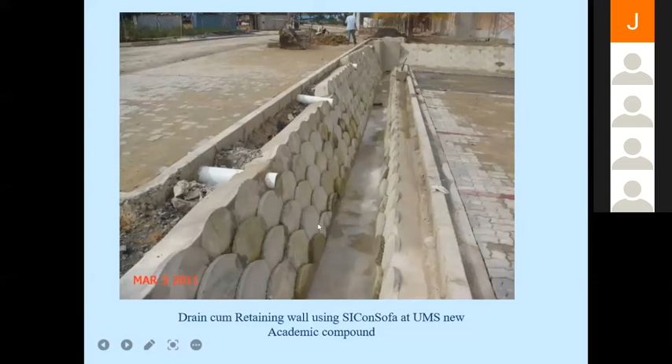Just look into this one, because the scupper drain is here, since water has to come. Another disadvantage we saw in this project, because once they placed this, they said the drain bed is quite below the design invert level. That's why they created this concrete to get the level right, because that lower side is far below the other side. That's why they filled this portion.

You can look into this one. In this system, I have not seen water holding, which is what we consider for mosquitoes. You see here, it is always in dry condition.

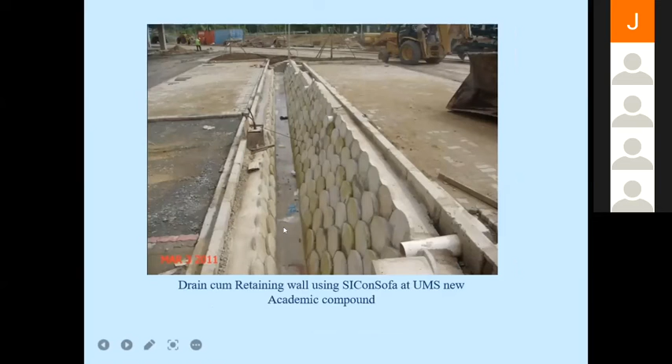This photo was taken this year, I asked someone to send it. It was built in 2010, and this is 2021. You can see the maintenance period - they do not do any maintenance except grass cutting.

Like this one, this is the bottom side because water is continuously coming from that side. Here we can see the water, but on the other side there is no water. Here also, if you look, the green grass, they keep cutting it. If we allow this grass to grow, then heat can be minimized as a green product.

You can look into the surface load application, meaning the parking area. They place their car like this one. In one sense, this confirms the surface load is okay. Sometimes they also put a motorbike. Then we look into whether we can go for other applications or not.

This is the main drain at my previous university, made of rubble wall, 2.7 meter deep and 6.15 meter wide at the top. I thought maybe I could propose using my block, and I proposed it to the authority. It's up to them because it's already made, so they cannot replace it using my idea, but I have given them the idea.

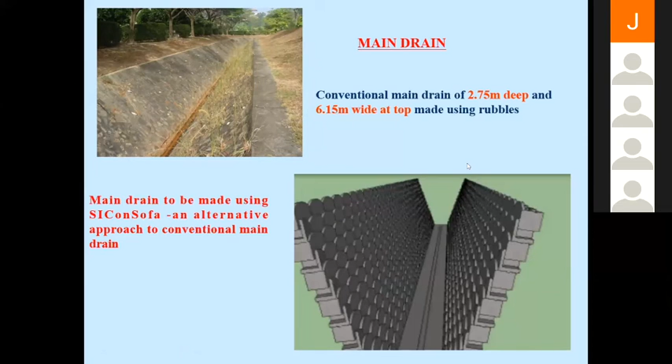In another project, we tried, but the cost was high, that's why they did not consider it. It was about a 2 kilometer retaining wall project in Sabah, and at that time I left, so due to miscommunication we could not manage this one.

In the same arrangement, a 2 meter height retaining wall can go using my system. We have proposed this to the client, like this, and how this can go. Further, they looked into cast-in-situ bedding, then I proposed that cast-in-situ bedding can go.

Then there was another project, they were looking into a gabion wall, 3 meters deep. I said I can propose like this, because finally they considered the gabion wall cost effective due to the wire mesh, used to put the rubble and fix it. But to me, it does not look nice. I proposed another option, and the company could go like that, but it did not materialize because I left that place.

It needs continuation. Okay, just look into it from the design point of view, the retaining wall structure. We have to look into sliding factor and overturning factor, including surface load. We consider different heights, 0.5 meter to 3 meters. Our normal drain is considered at most 1 meter, a roadside drain. Then I looked into different heights and also the angle.

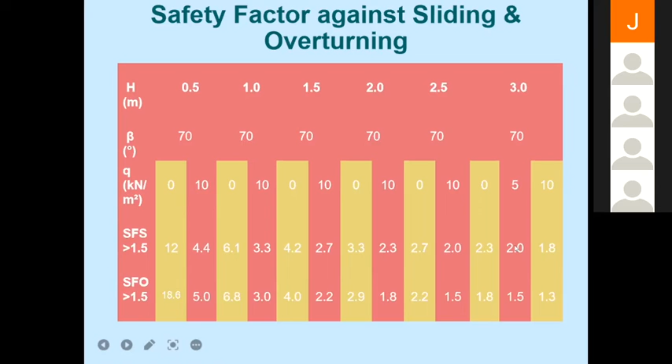We have provided 70 degrees and also other angles. Then we also provided surface loads of 0, 10 and 5. Then we looked into the safety factor for sliding and overturning, whether it is more than 1.5 or not, and we got this result. Then looking at, say, 3 meter height, then considering surface load, the safety factor for sliding should be more than requirement. I have also gone with 68 and 65 degree slopes, and we got satisfaction.

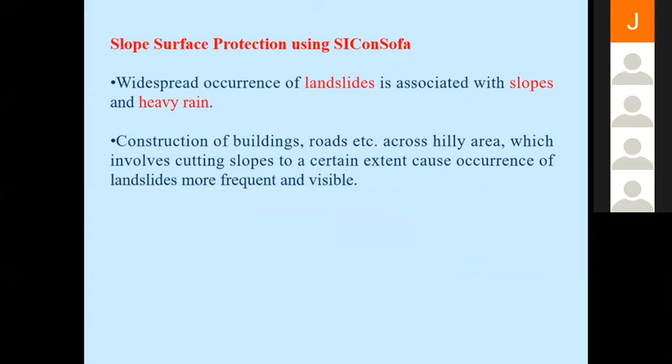Same story, I'm not reading this one. We look into how they do that covering. Normally in Malaysia, the slope surface is covered by vegetation or a rigid surface. For vegetation surface, they normally use signal grass and legumes. For rigid surface, they normally use shotcrete or masonry.

Shotcrete, masonry, or stone pitching is used as rigid surface protection. This system is highly impermeable. Weep holes are provided at regular intervals, horizontally and vertically, to reduce build-up pressure on the slope during rain. Sometimes soil nailing is also done, including shotcrete application. Hydroseeding is also done, like grass rooting or something like that, for protection.

So I looked at it from a different point of view, because my product's orientation goes deeper and looks like fish scale. I looked into a conceptual approach for slope surface protection using my blocks, shown in the following figure, but it needs investigation to fulfill construction industry requirements, because I have not done any work on slope surface protection yet.

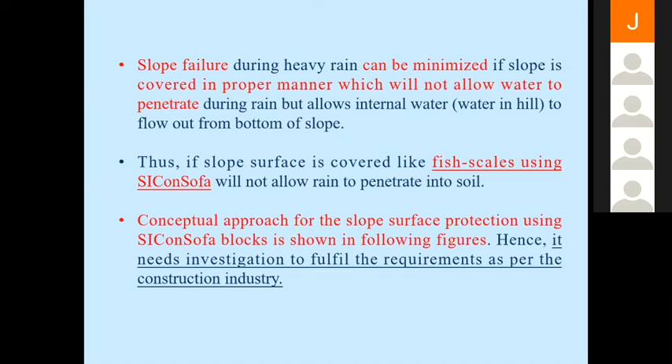Or look into this one — though they have given lining, all the slopes failed, because this is a highly impermeable surface. Also look at this one in the university campus. These are considered shotcrete areas including weep holes.

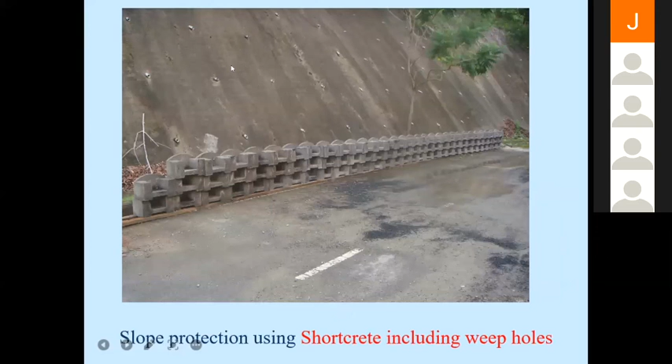Then I looked into how my product could go, like a fish. I can look into a similar arrangement. When the rain happens, water cannot penetrate inside. That's my concept.

I have done a little more something like that. My product can also go here, where they consider the retaining structure area. We can use this concept too, but I have not done it. Then look at this one — if you make this consider slope surface, the appearance will come like here.

Then we also have to provide a cascaded drain. I have provided drains at the side and also at the bottom. If the slope has many layers, we provide this, including considering the drain interruption at here. What I'm saying is, when the rain happens, water will not go inside. I claim this, but I have not done it.